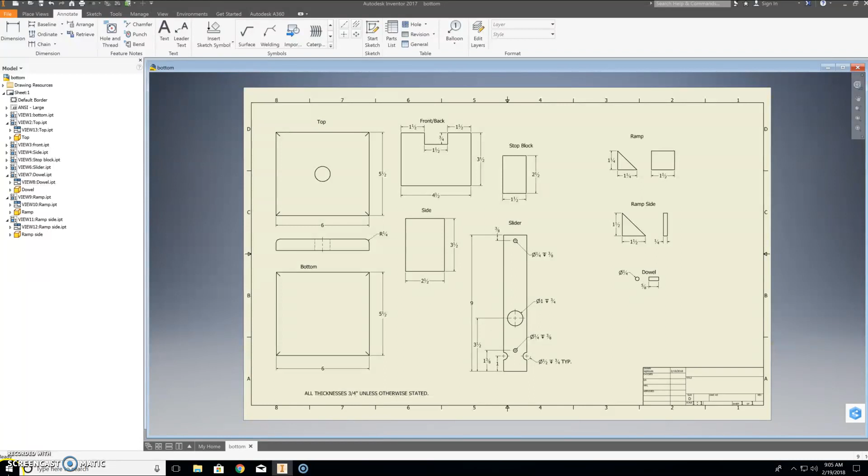So, to begin with, you guys are probably going to see a screen that looks like this. So the first thing that we're going to do is click on Drawing. We get the white sheet that we're working from before.

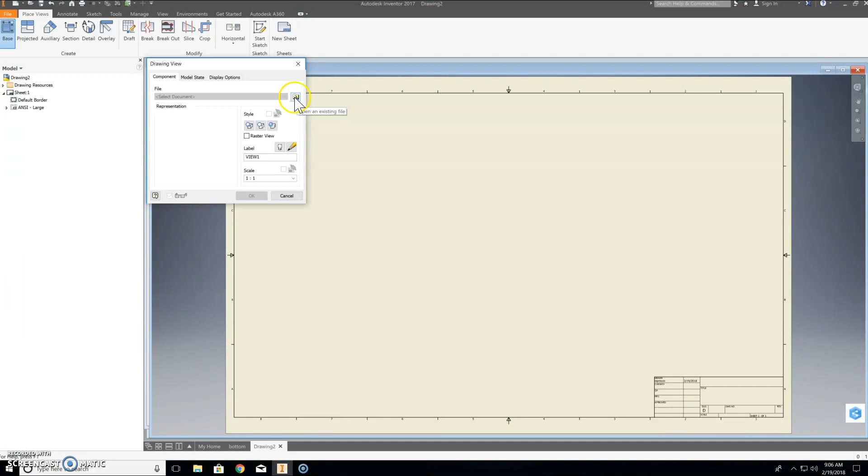Now what we'll do is use the base button here, and it's going to bring up the drawing view menu. From here, we're going to click on the icon right here that's going to allow us to open up an existing file, and hopefully this will take you right to your place. If not, you can use this menu to search for your name, and underneath there you should find all of your drawings that hopefully, if you follow the directions, you have labeled like I have here.

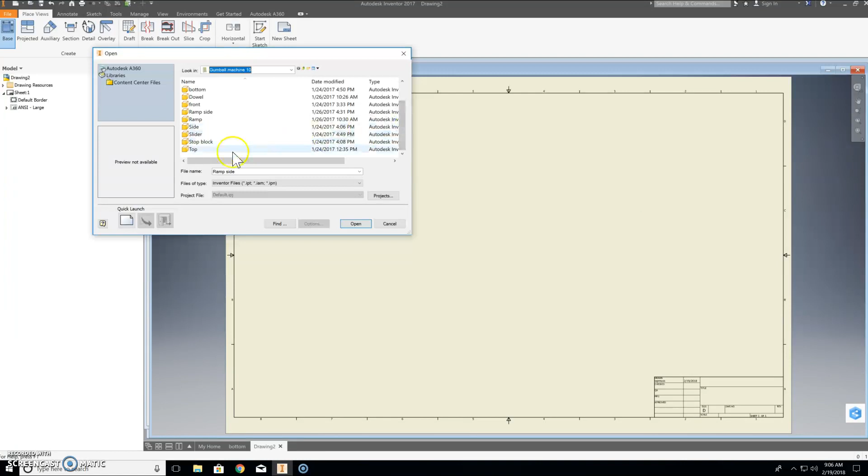Okay, what I would suggest to you is start with the biggest pieces first. Top would be one of them, the bottom is going to be the other. So click top, click open, and it's going to appear on the screen. Right now, I don't need to worry about where I have this moved yet. I just want to make sure that it is on the screen.

I can change the scale, and if I make this larger, that's possible, but I don't think all the pieces are going to fit onto the screen, so try to leave this as 1:1. And then if you notice how there's a dotted green line here, I could put in top views, right side views, but because there's not a lot of information that's going to be shown there, I'm not really going to do that. So I'm just going to leave it in the view like this.

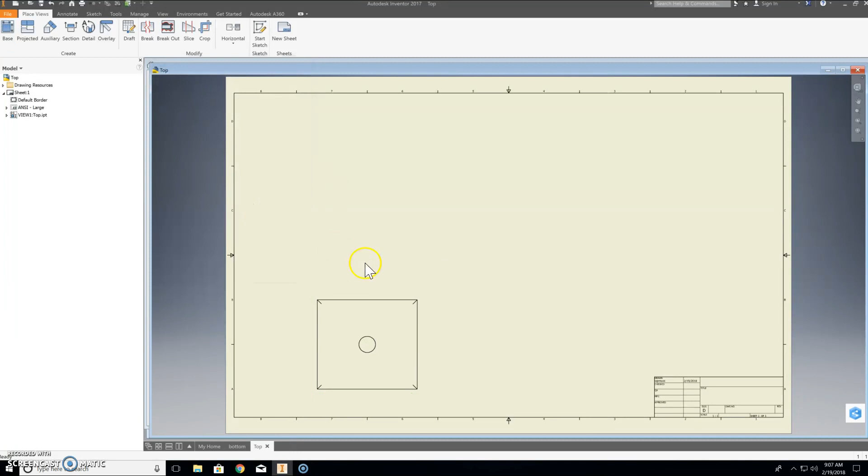I'm going to put a note in later. So from here, hit OK. The piece is going to appear like this. And now I'm going to move this up along the top.

I'm going to go back to base, back to my open existing file button there. I'm going to go to bottom, hit open. I'm going to move this one again, kind of like I have the top. Leave the scale 1:1, hit OK.

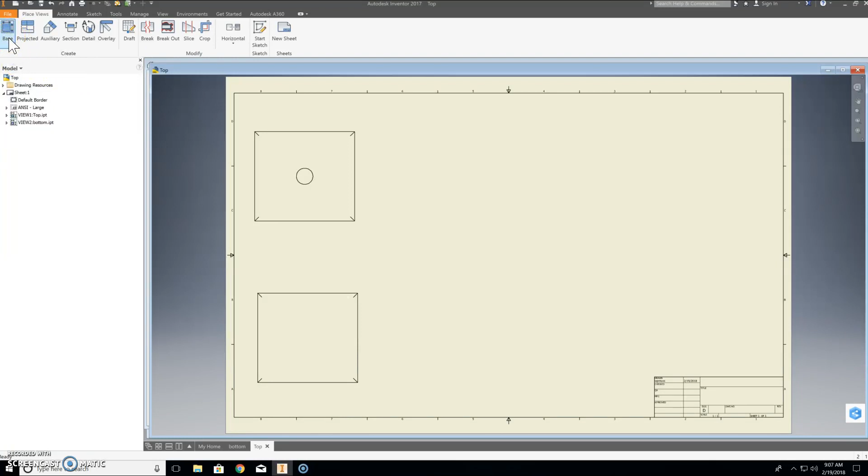I'm going to go ahead and put in the rest of these pieces, but our process is going to be the same. Click base, open an existing file, click on the parts.

So what I'll do here, like I said before, I'm going to pause this video and continue to put in these pieces, and you can do the same, and then once we have these in, I'll show you what we're going to do from there.

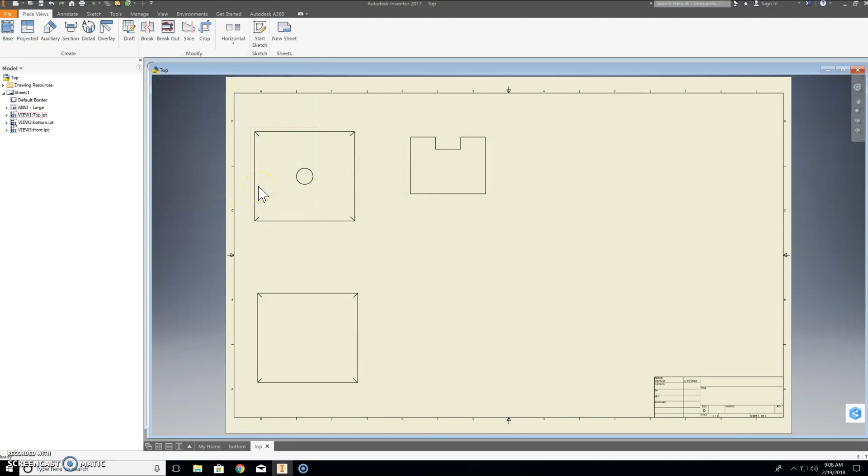Alright, I have almost all of my pieces in, but I do want to show you one thing here quick before we start back up. A couple of these pieces here I've put in a side view. So we have a front view and we have a right side view. This is for our ramp. This is for the dowel.

Okay, one of the things that happens while I bring these in is that the scale changed. So it tried to use a bigger scale to help it fit more of the page. But I put these back to 1:1, and I want to show you that quick with the ramp side I need to put in yet.

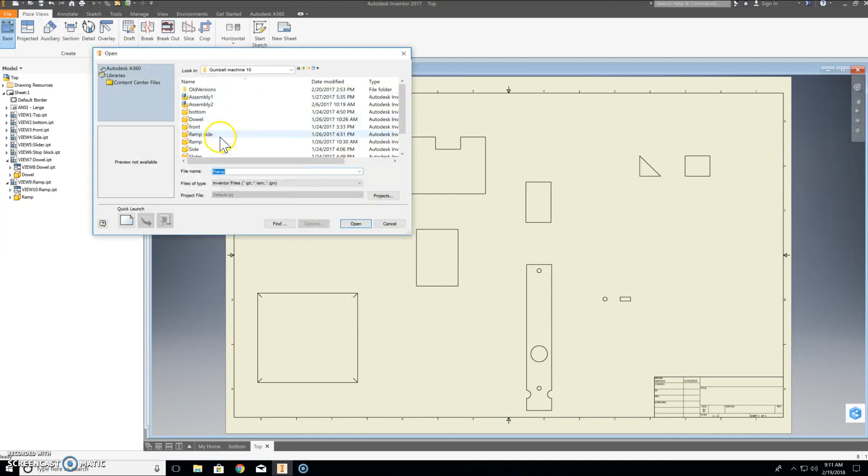So when I click this, you see that it's quite a bit larger than what the actual dimensions are. So this is saying that the scale factor changes of 4:1. I want to leave this as 1:1, so that way everything looks like it should. I think it'll be easier for us to see those parts when we get out into the lab.

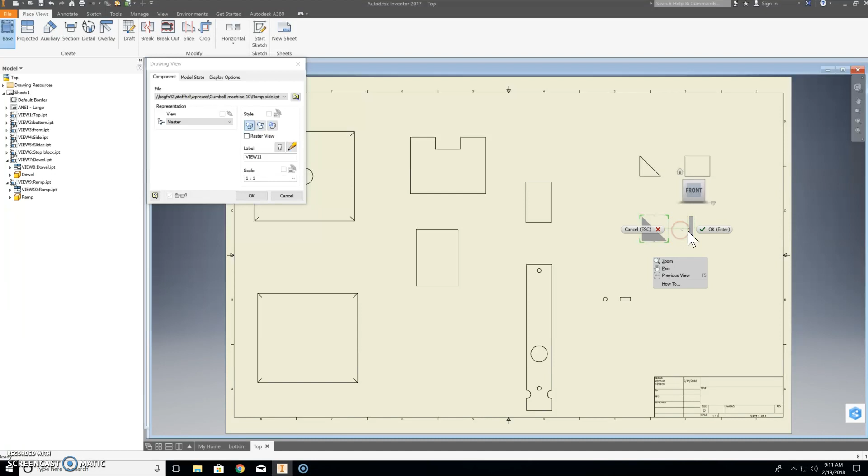Okay, the other thing that I did was, like I said, add that right view in. So if I bring my cursor over to the side here and left click, it will allow that right view to come in. I can do one of two different things now to add those drawings to this sheet, either by clicking OK, or the other thing I can do is right click and hit OK, but either of those will work.

One other drawing I might add in here is from my top view, to show that we have routed edges on both the top and bottom piece. To do that, I'm going to go to Projected, right next to Base, which will work with a drawing I already have out here.

I'll come down here so it looks like we're seeing that top face, like the front view. Click here, then right click and hit create. That'll put it in. Because this was the top view, it's also going to show the hidden lines for the hole in the center.

Now the next thing I want to show you guys is how to add dimensions, and in the case of the holes here, center lines. I'll go to Annotate next. This will allow me to dimension, and these buttons will let me mark my center point. This first one, the center mark, lets me put the center mark in the hole.

This center line bisector lets me put a center mark between two hidden lines. I just click on the two hidden lines, and it puts the center line right through the middle. I'll also use the center mark button for the slider, marking the 3 holes we have, and then the 2 half holes, which will tell me the center point for those as well.

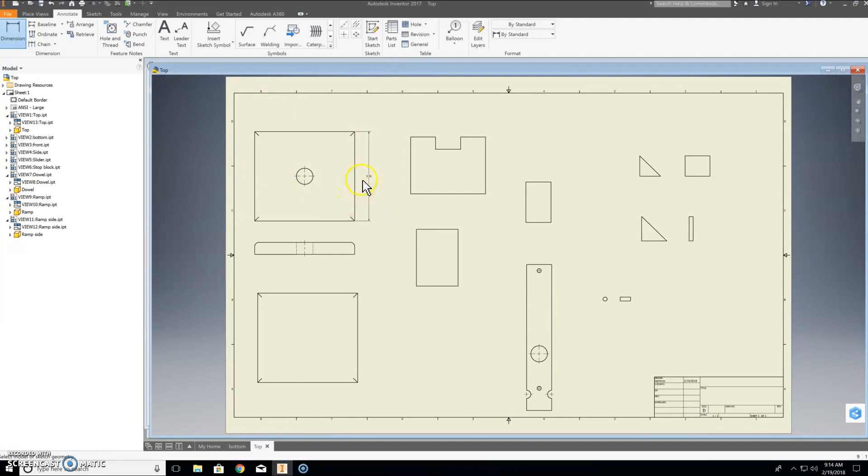Now I can start adding dimensions. So, dimension - this part's pretty easy. I click on the line I want to dimension, bring the cursor out until I get a dotted line, and click. When I click, this menu appears. Right now I'm just going to hit OK, since there's nothing to change with the dimension - that would have to be done in the original drawing that allows us to do this.

Okay, and I'm going to continue to do this for my pieces. Now again, I'm going to end up pausing this and allow you guys to put the dimensions on. As I work through this, I'll stop again here to show you a couple things.

One of those, before I stop, is going to be the dimensions here for your front piece. Again, we're going to need to know how long this piece is going to be, how tall. Then you're going to put in the dimensions just like you took for your sketches, to be able to draw these with the program.

Alright, so I'm going to pause these, put in some dimensions, and then I'll show you what our next steps are. Alright, as you can see, most of my dimensions are now in. But there's some things I want to call out here with the slider, because this one is going to be a little bit different than what we've done in the past.

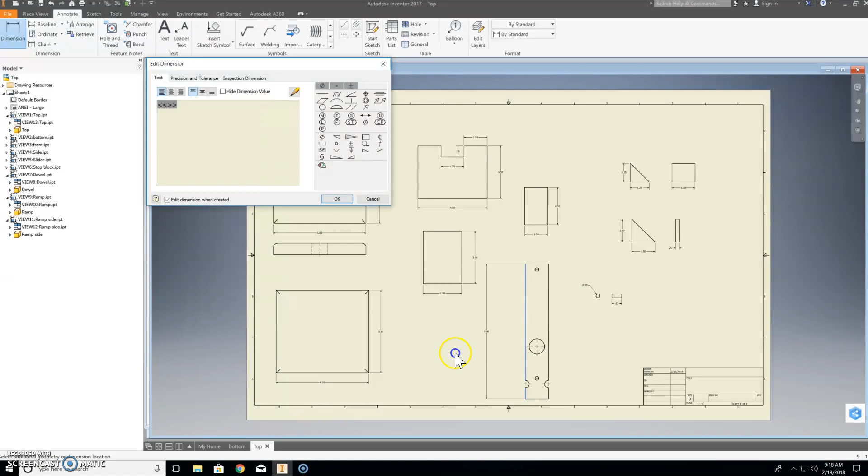The reason it's so far away is that we need room to put the rest of the dimensions in. So I'm going to zoom in here just a little bit so we can start putting the rest of these in.

So again, click on the green dot, click on the green dot right here at the end of this center mark. This one's going to stay close. Alright, excuse me - let me try this one more time. There we go.

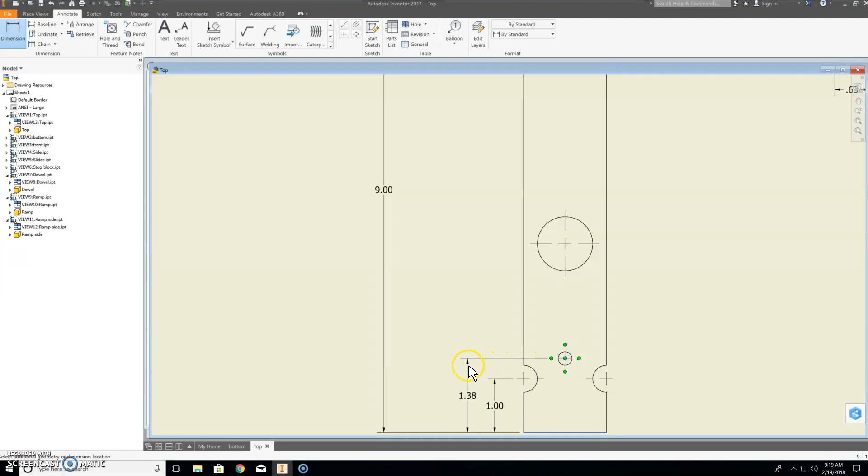Then you notice those dotted lines again. If you can get those to click there, that would be fantastic. Notice how I'm clicking on the ends of those center marks, not in the center, because we want a little bit of space between where our extension line begins and where the part of our object that we are dimensioning stops. So there should be a gap. These shouldn't be touching.

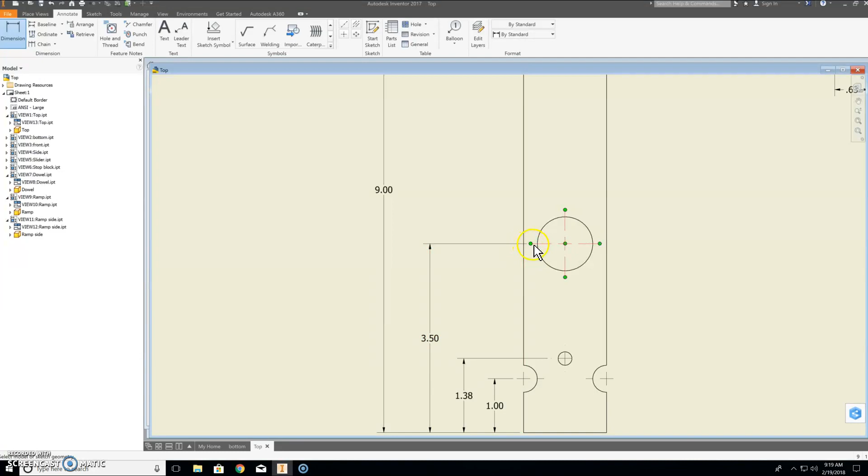One final dimension here. Again, this one would be close because it's only one, but it would give us room to do other dimensions if we needed them.

Now, the other thing that we have here is we need to put in information about the holes. If I just use the dimension tool and click on this, it just gives me the diameter of the hole. I don't want just the diameter. If you recall, we set a depth for how far we drilled this hole and this hole out. So I'm going to delete that dimension, and I'm going to show you guys this tool here—it's the hole and thread notes button.

With that selected, I'm going to click on this hole. Notice how my information changed—it has the diameter of 1/4 of an inch, but it also tells me how far down it goes. In this case it says 0.38, but we're going to change that to fractions, and that's one of the next things I show you. Use the hole and thread button, because it gives you not only the diameter, but the depth it needs to be drilled.

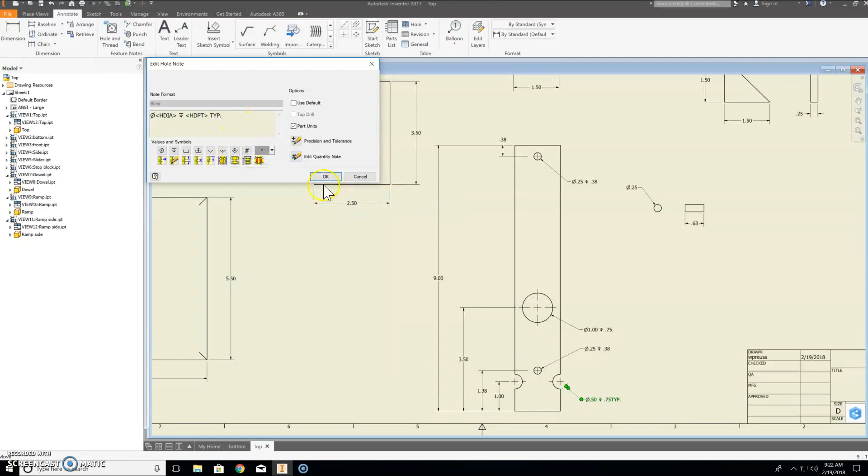I should have put a space in there, so let me double click that again and add a space. Now this 'typical' tells me that anything that looks like this feature is going to be the same size—so this would also be a 1/2 inch diameter, drilled 3/4 of an inch deep all the way through this piece, following the same pattern as this one. I could have done the same for this hole and this hole and only dimensioned one, putting typical as a note, but we had the space, so we went ahead and put the dimension in.

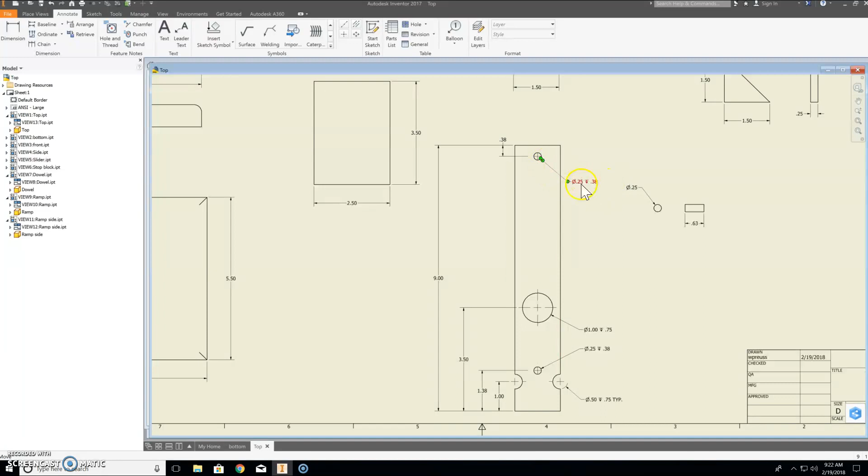Now, the next thing I want to show you guys is how to label these, because you are going to want to know what parts these are. Really simple—text tool, click above the object that we want to label. This one happens to be the top.

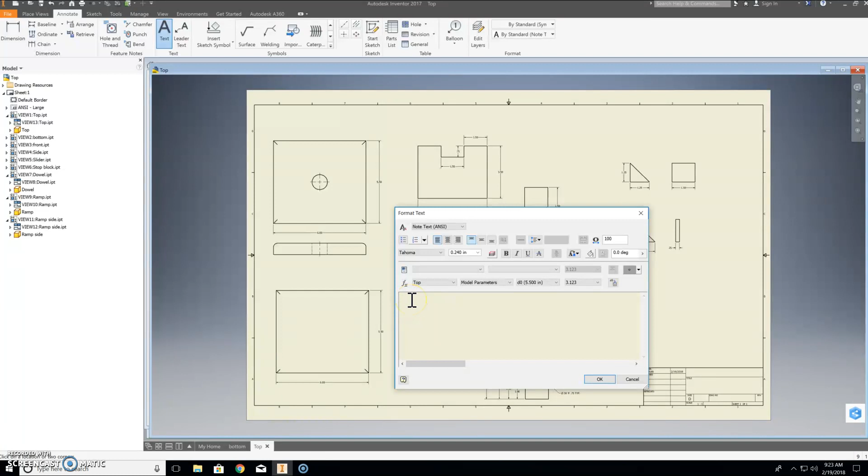What will help immensely for you guys to be able to see this is if you click the drop down arrow here, change this to 0.240 right now, and then with caps lock also selected, just write 'top' and hit OK. We're going to do that for each one of these pieces, and I'll show you the first couple, then pause this and let you guys continue.

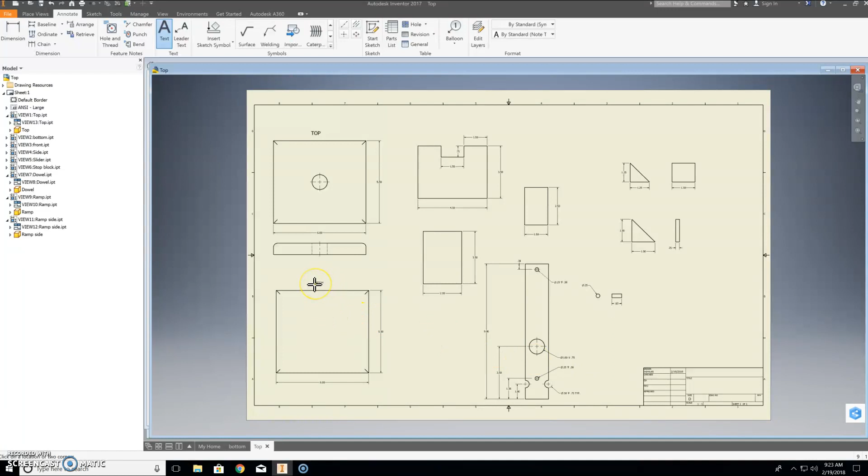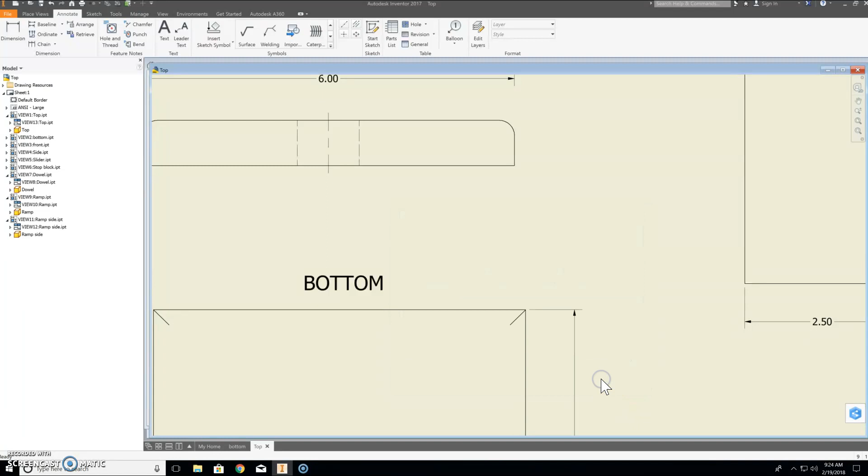Now you see here that I didn't change my height of the text. It's okay—if I hit escape, double click this, the menu will come up. I have to highlight the text and then click on the 0.240 button. If I don't highlight it, it won't change it. So make sure that you do that.

So here we've got our dimensions on each one of our pieces. We have the pieces labeled. And the last thing that we need to do is change the dimensions. I'll show you how to do that in the next video because this one has gotten rather long. So take a look for the next one—it'll be part 2 of our dimensioning stage. Thanks much, guys.